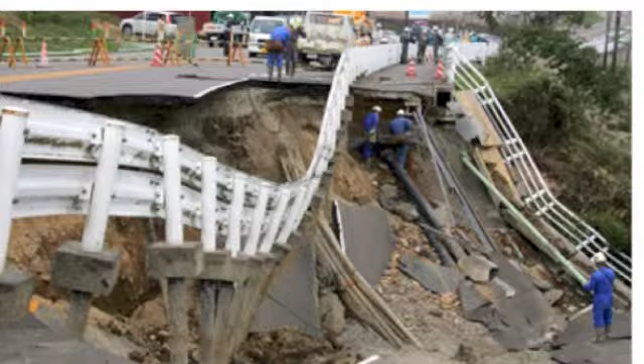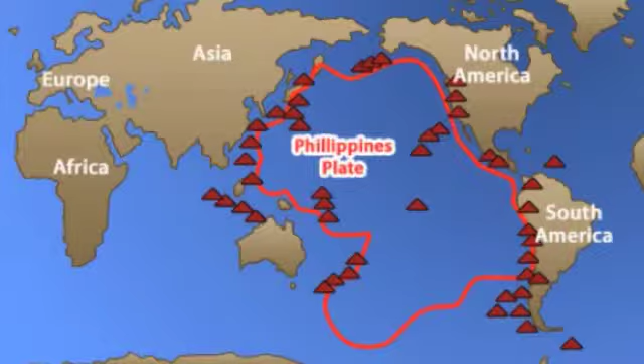The reason earthquakes occur is when tectonic plates release energy. Earthquakes are most likely to hit places surrounded by the ring of fire. Countries in or near the ring of fire are most likely to be affected by earthquakes. The reason it hit the Philippines is because the ocean's crust is being crashed into the continental crust.

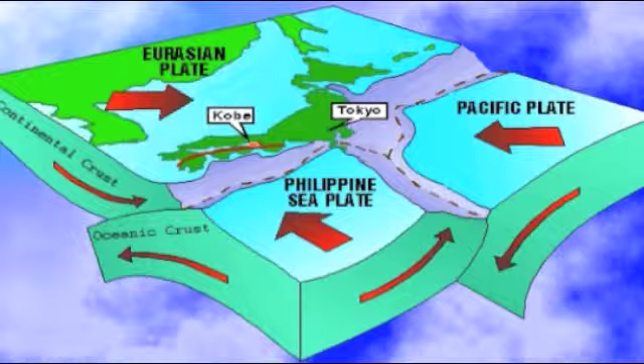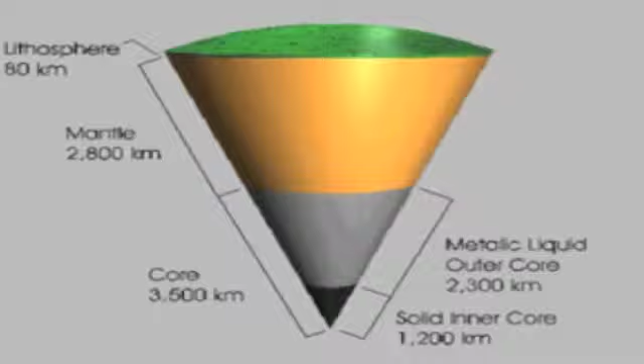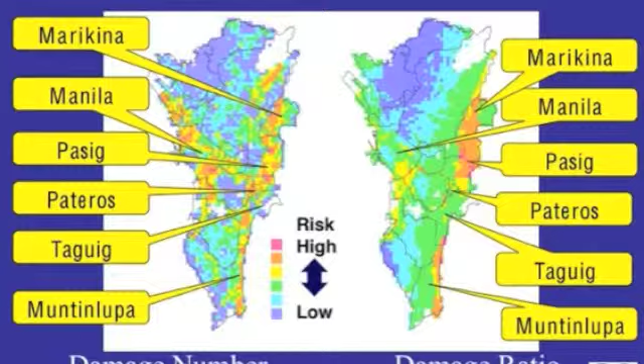Since the problem in this country is reconstructing buildings, building an earthquake-proof building will help the country a lot. These are some images showing how badly the buildings have been affected.

Earthquakes can damage a building or bridge when the material used to build the structures is not strong enough to withstand the earthquake, and this happens.

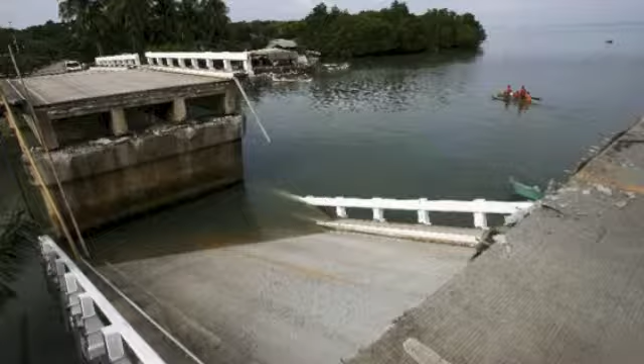Another reason could be the preparation of the country. The country may not be prepared for such natural disasters, as it may not have occurred in that certain area, thus buildings were not built to be disaster-proof.

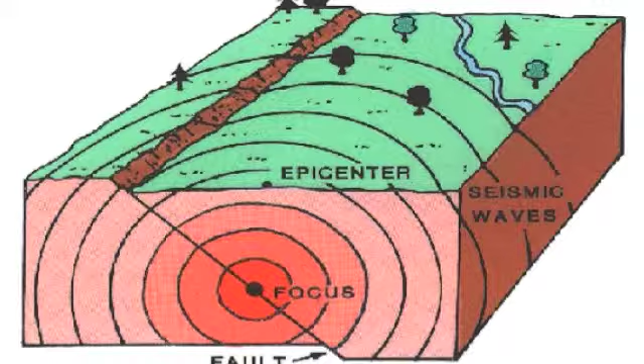This shows what happens when an earthquake is occurring. Some scientific principles that would have caused this in the past would probably be compression, as the force from the ground and from the top of the building push into each other, squeezing the building from forces at the top and bottom, which can cause the building to collapse.

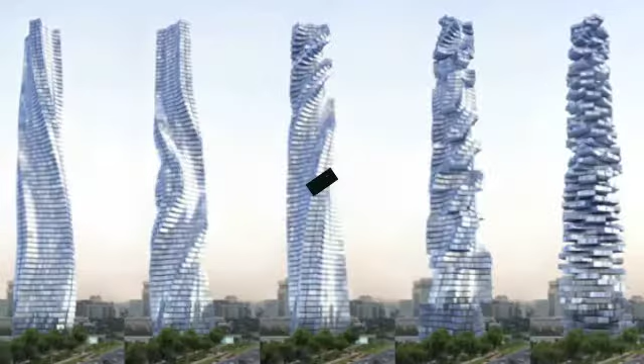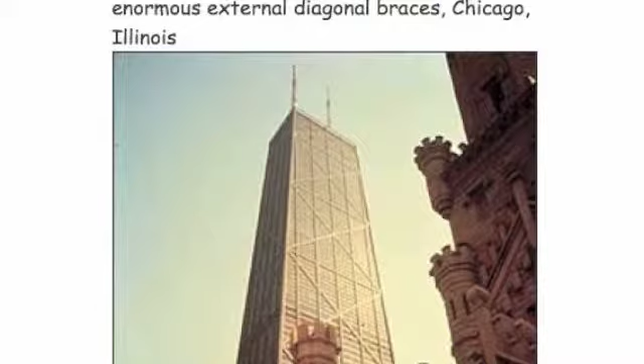Isolation bearings are something constructed as the base. It helps keep the building from falling when an earthquake happens, and the damage of the building will be decreased during the earthquake too.

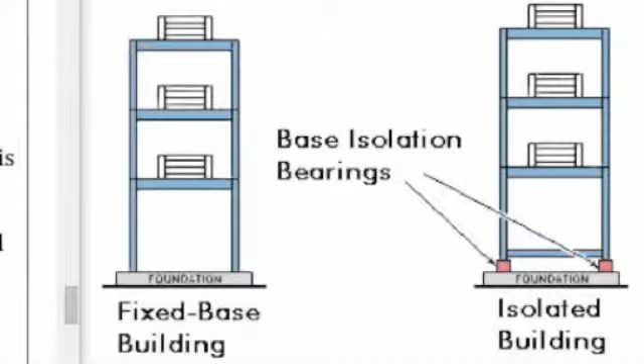Rubber bearings are placed between the bottom of the building and its foundation. The bearings carry the weight of the building, which is why they are designed to be very stiff and strong for the vertical load. However, they are designed to be weaker for horizontal loads, so they can move sideways during the earthquake.

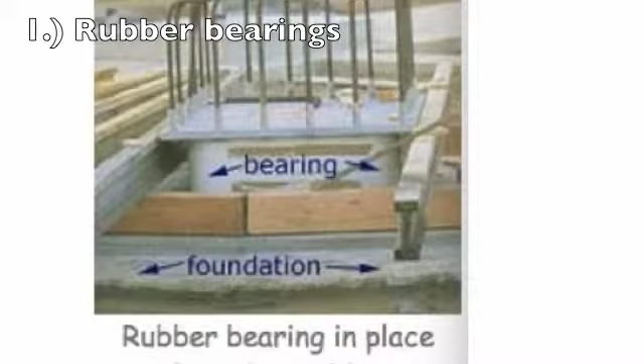Here's what happens to the rubber bearings as the earthquake happens.

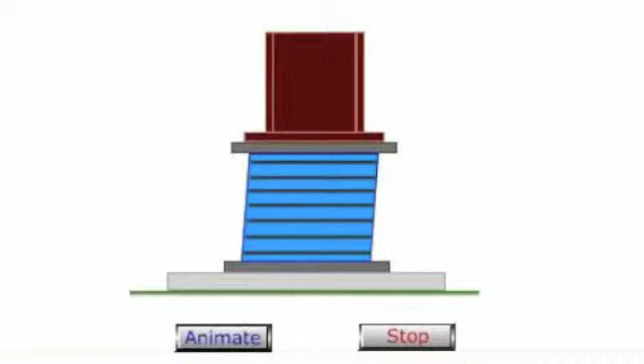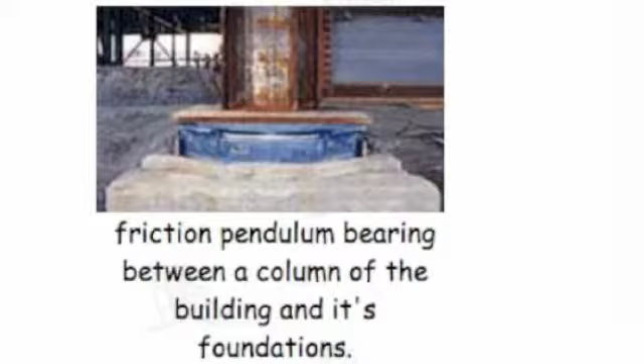Another type of isolation bearing is called friction pendulum bearings. They are designed to be very stiff and strong for the vertical load, so they can carry the weight of the building. However, when they slide, it means the earthquake movements will occur mainly in the bearings. It is also placed between the bottom of the building and its foundation. This is how friction pendulum bearings work.

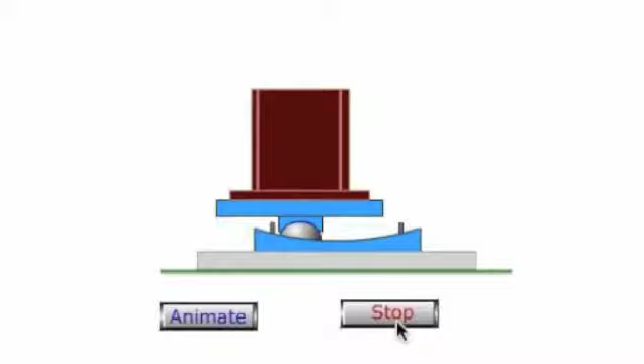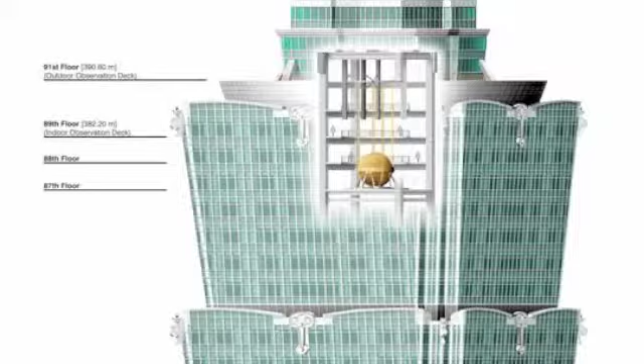To keep the building from swaying, there will be a strong core in the center of the building, called a tuned mass damper, also known as the harmonic absorber. It helps reduce the vibration of the structure.

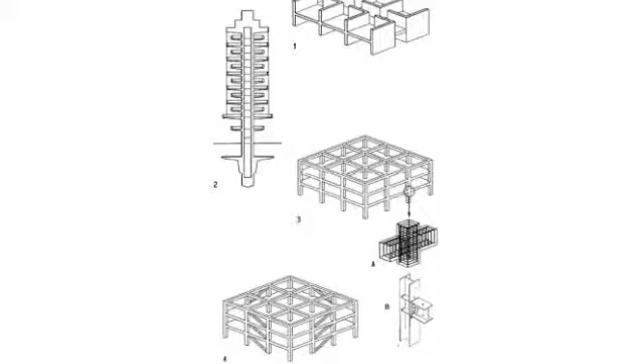Vertical structural systems are made up of columns, beams, walls, and bracing. They transfer sideways forces on the building to the ground. The vertical structural systems included braced frames, moment-resisting frames, and shear walls.

Shear walls are constructed as a rigid vertical diaphragm capable of transferring lateral force from the outside walls, floors, and roofs to the ground foundation in a parallel direction to their planes. Vertical truss or reinforced concrete walls are examples.

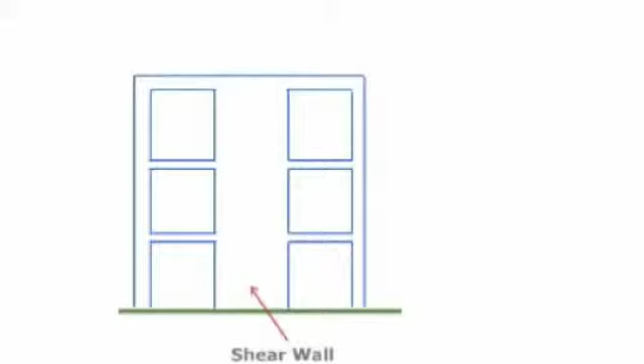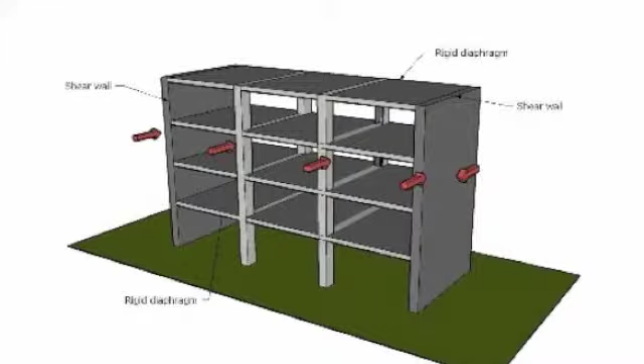To keep the building from tearing apart, strengthen the frame by attaching or placing a rigid wall inside it to maintain the shape of the frame and prevent rotation at the joints.

What is a brace frame? Brace frames use trussing to resist sideways force on buildings. It also helps stabilize the frames against sideways forces from earthquakes and strong winds.

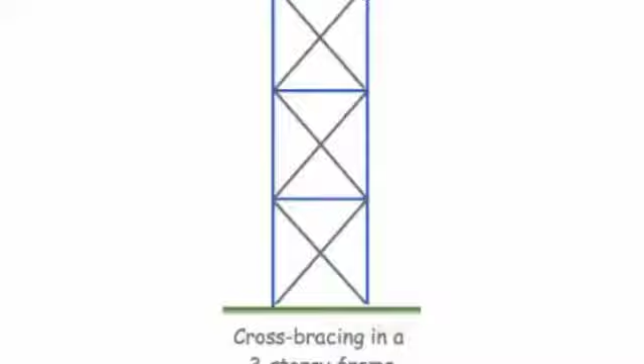A brace frame example is cross bracing, when two diagonals are used to form a cross. This type of brace only resists in tension. This is because one brace is in tension for the sideways force in one direction on the frame, while the other brace is in tension when the force is reversed.

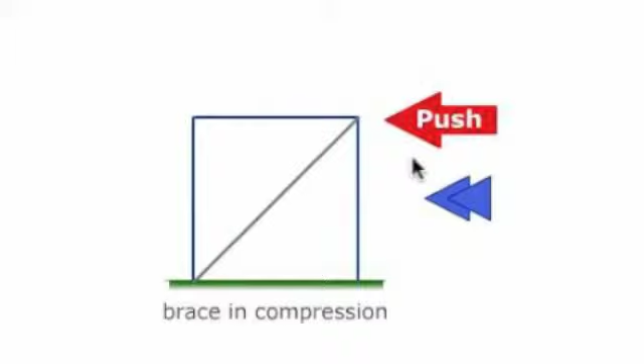Another type of brace frame is called single diagonal. If used, it must be able to resist tension and compression caused by sideways forces in both directions on the frame. This is an example of brace in compression, and this is an example of brace in tension.

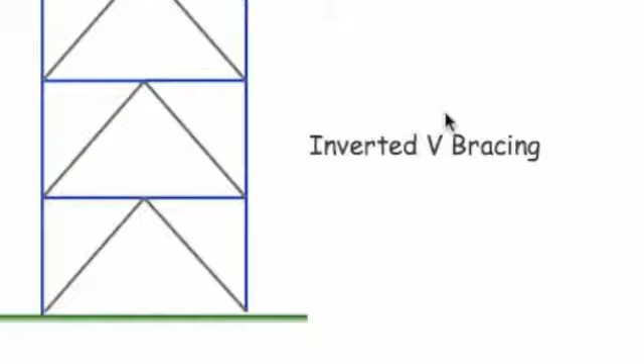These are other types of brace frames, such as inverted V bracing, K bracing, and knee bracing.

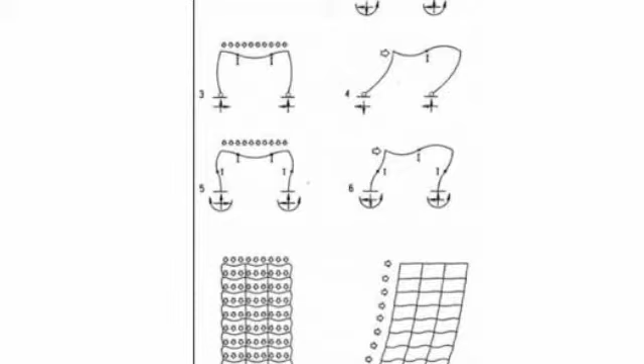The connections between columns and beams are designed to be rigid. The columns and beams bend during earthquakes. These structurals are designed to be strong in bending, so basically this frame is the frame that resists the force by bending. Here is an animation of the moment-resisting frames.

Horizontal structural systems are usually constructed for floors and roofs. They help share the sideways forces on the building between its vertical structural members. The two things included are diaphragms and trussing.

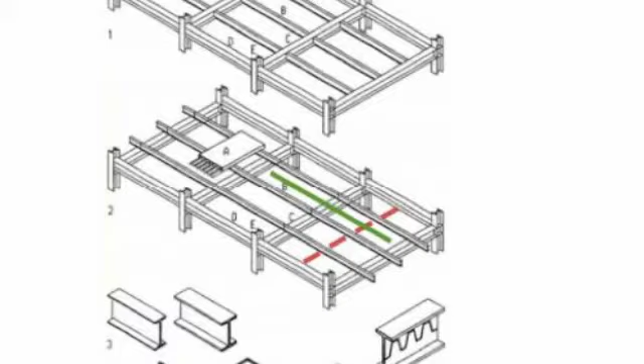Horizontal diaphragms are usually floors and roofs. When a diaphragm is stiff enough in its horizontal plane, it can share the sideways earthquake forces on the building between the vertical structural members, examples such as the columns and the walls.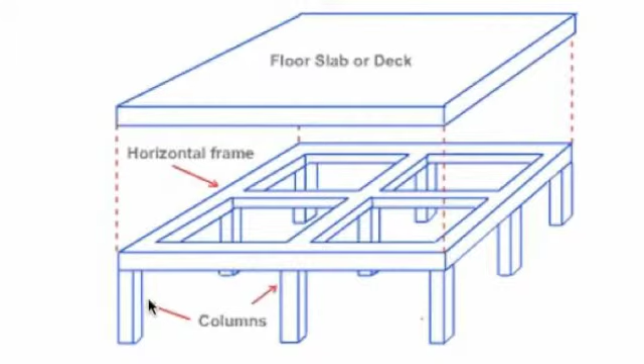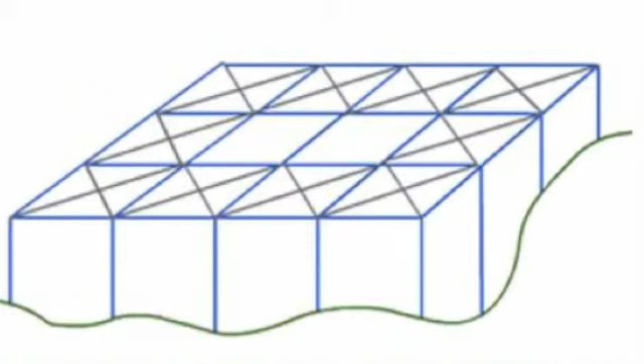Another type of horizontal structural is called horizontal trussing. It is usually used in roofs where there is not enough deck to allow the roof to act as a stiff horizontal diaphragm. The trussing can transfer the sideways earthquake forces on the building to its vertical structural members, examples being columns and walls.